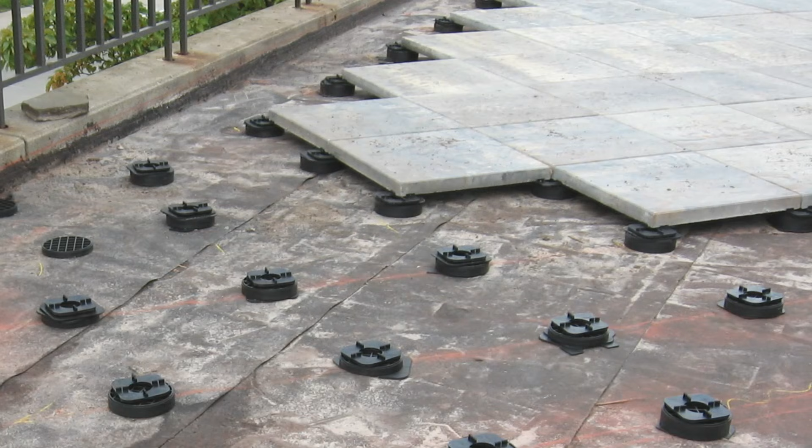Rooftop decks are probably one of the most risky building conditions that we consult on and are a favorite of architects and clients alike. If you're a builder or a roofer, you probably hate these things because of the risks associated with leaks, condensation, foot traffic, attaching railing systems, and all the other stuff that goes along with the complexities

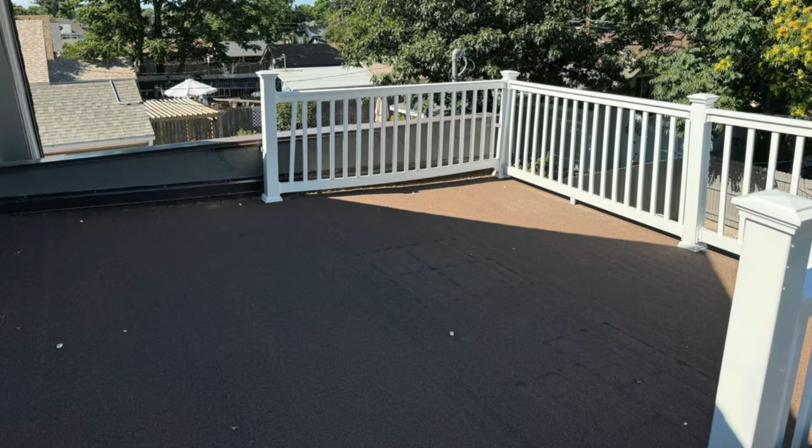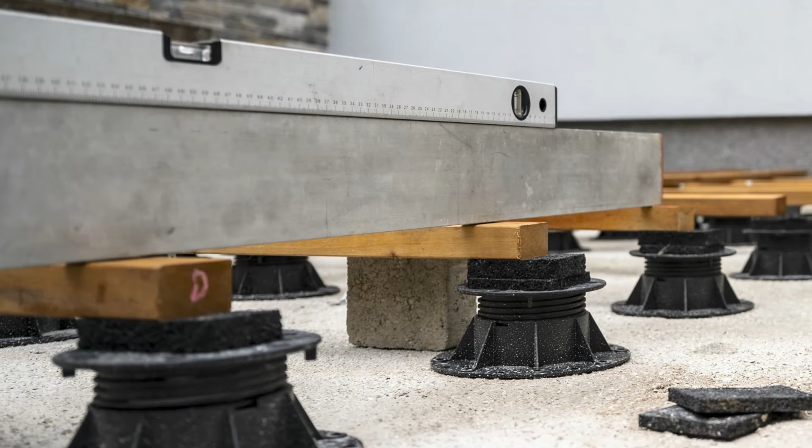of these systems. However, there's one huge problem that we see all the time when it comes to a walkable rooftop deck or terrace that's seldom accounted for by architects and designers, and we catch this error frequently when we redline architectural plan sets before they're submitted for permits or construction documents, and that's the fact that no one ever takes into account the thickness of the roof assembly components relative to the elevation of the finished floor. Now, you might be thinking, what you talking about, Willis?

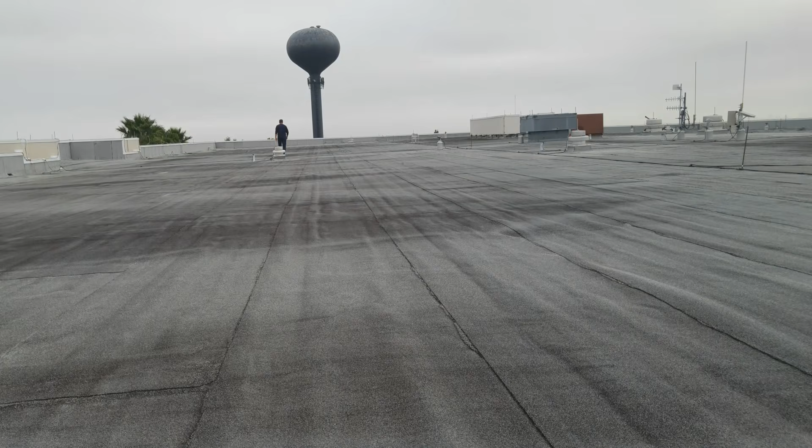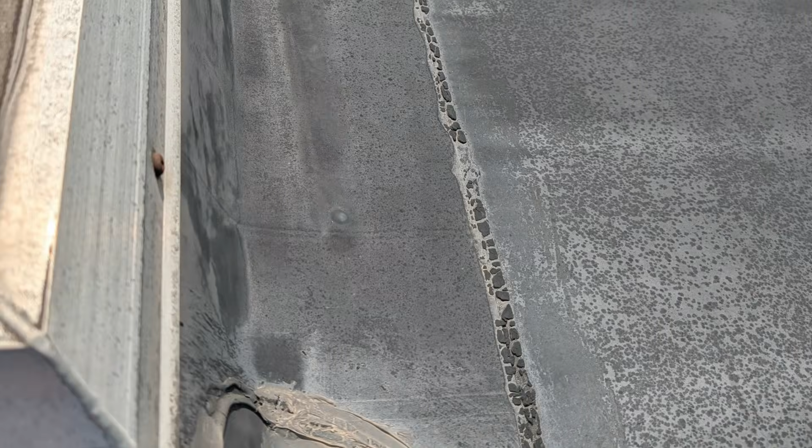Rooftop deck assemblies are essentially flat roofs that you can walk on. Flat roof assemblies are designed in a very specific way to manage drainage, water intrusion, wind uplift, condensation, and general weathering and exposure. They need to be designed as unvented assemblies with exterior insulation to manage condensation by warming up the condensing surface of the sheathing or structural decking, and that exterior insulation also should be part of a tapered insulation system to provide a slope to the roof assembly.

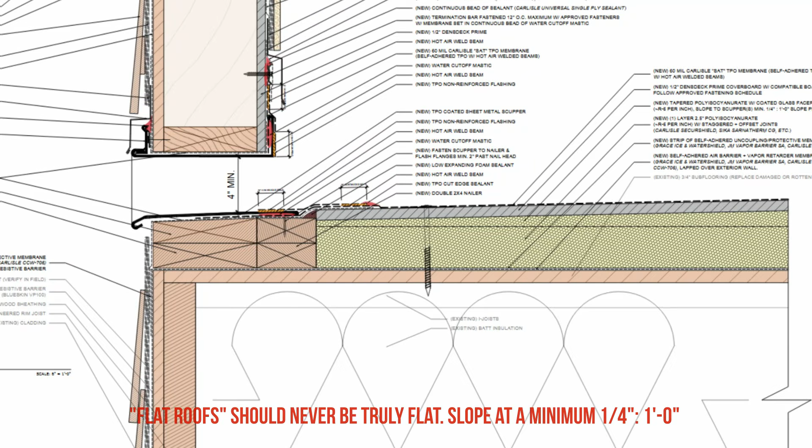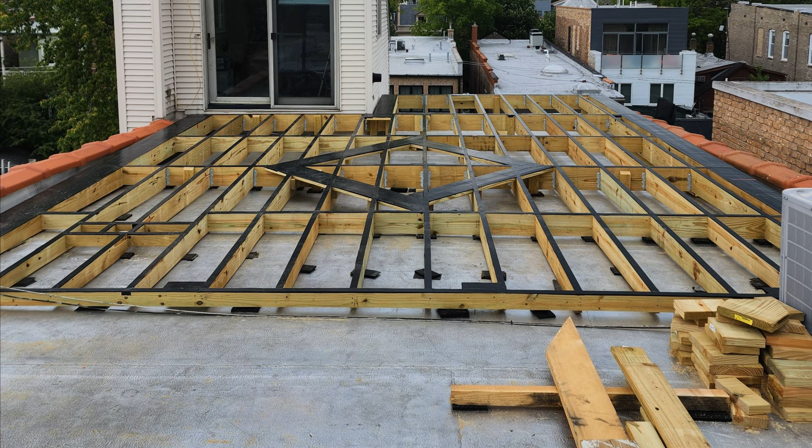Remember, flat roofs are never actually flat. They have a slight slope of 1/4 inch per foot to drain water off of the roof, or at least they should. Now, between the buildup of the rigid insulation and the tapered insulation, as well as the thickness of the pavers or decking system that you're using, and the total length of that roof from the top of the slope to the bottom of the slope, this can add some substantial thickness to the roof assembly. And what we end up seeing is that the buildup of those components has a tendency to throw off the elevation of the door thresholds.

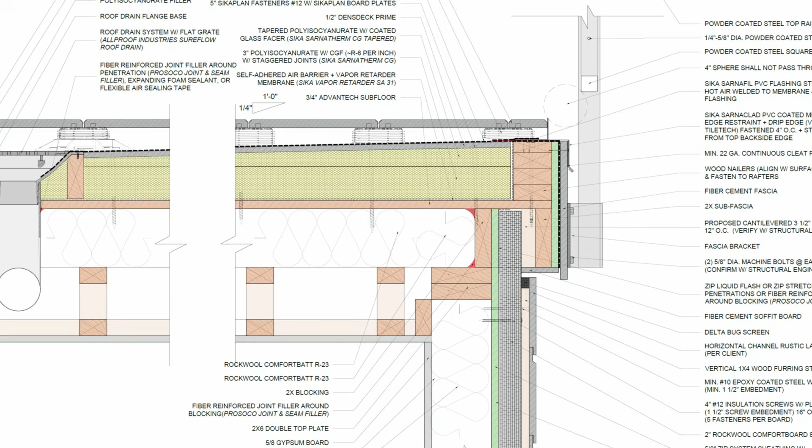Think about it, if you've designed the surface of the rooftop deck to be flush or close to flush with the interior finished floor so that you have a nice uniform transition, if you didn't take into account the thickness of the buildup below and the slope of the roof, then that buildup will impede on the ceiling height of the rooms below, as well as the structural system holding up the roof structure. Now, we need to have a dropped ceiling at these locations to accommodate that added buildup. Ask me how many times I've seen this happen.

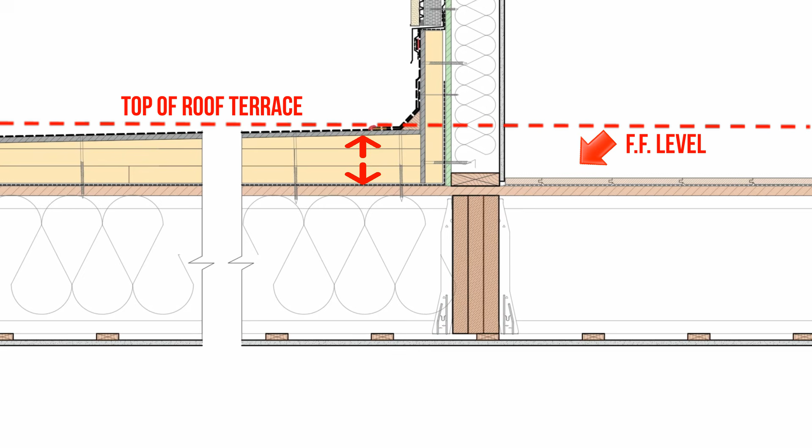On the other end of that spectrum, if the roof structure was designed so that the sheathing or structural deck is flush with the interior subflooring, then that means that the buildup of roof assembly components will push the finished surface of the rooftop terrace above the level of the interior finished floor, which is generally a big no-no from a water management perspective, unless you don't mind having a step up or a landing to get to the door threshold from the interior side.

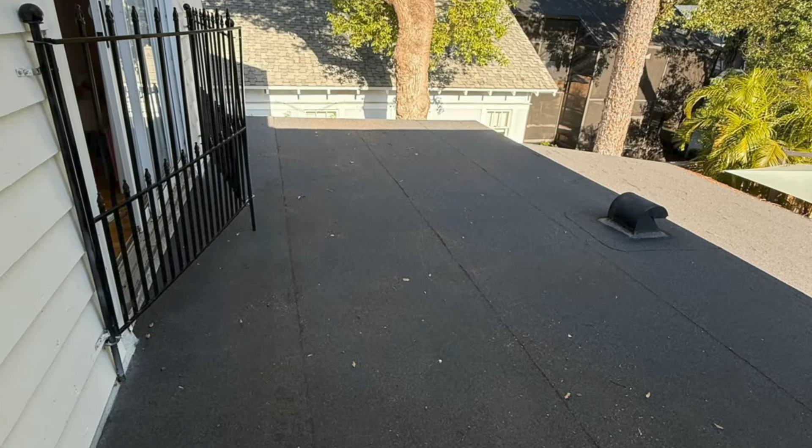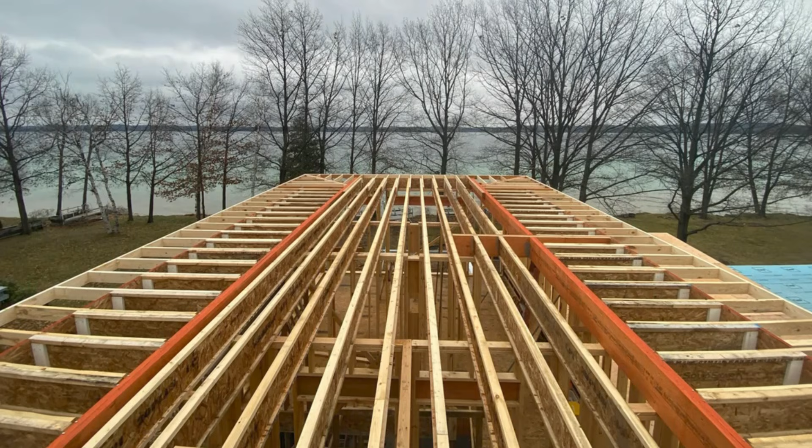We see this a lot of times on retrofits or additions in which the design professional hasn't accounted for the assembly buildup, and then we have to break the bad news that they need to redesign the roof and their ceiling heights. Sometimes the structural system can be modified to accommodate the thickness of the buildup without negatively impacting the finished floor elevations, but this is still a major disruption in the design process if this hasn't been considered.

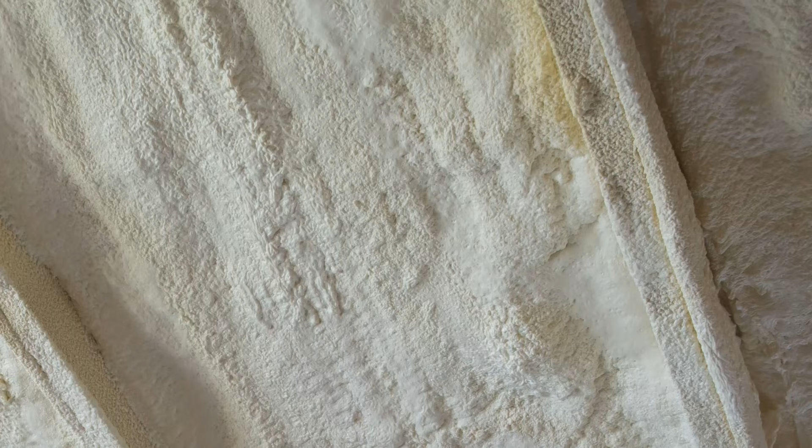Now, in a pinch, you can use closed cell spray foam on the underside of the roof deck to provide some condensation control, provided that you have a means of sloping that roof surface above to a roof drain or gutter system, but it's generally a last resort, as we have seen spray foam fail in these scenarios, especially if the foam cracks from building movement. However, it is a viable strategy if you have a little bit of tapered, rigid insulation above.

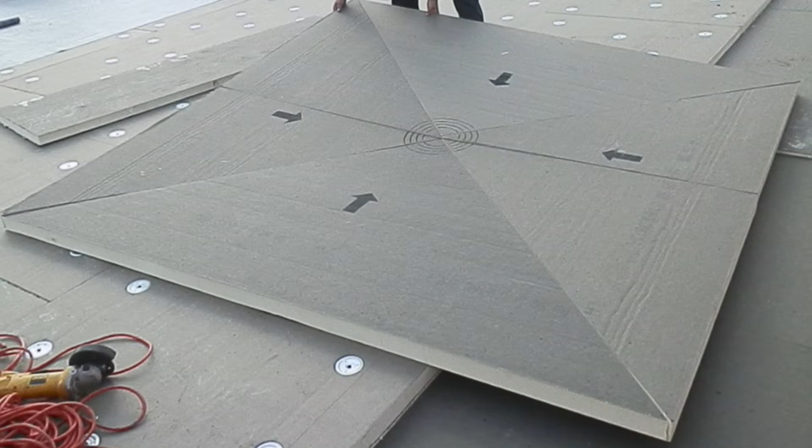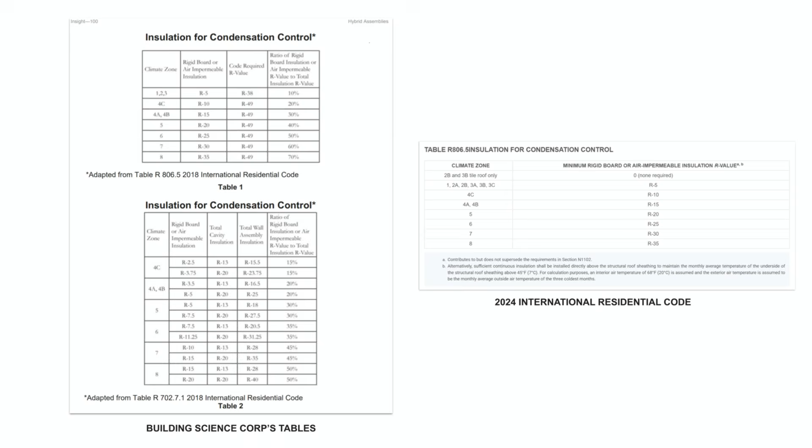As you get into colder and colder climates, the thickness of that buildup becomes a lot more substantial because we need more insulation outboard to control condensation, and so if you're building a rooftop deck in places like upstate New York or Maine, you need at least 50% or 60% of the total R value of the roof assembly installed as outboard insulation. If you need an R60 roof, you need at least R30 to be installed as exterior insulation, which is something like 5 inches of polyiso, and that's not even including the thickness of the buildup of the

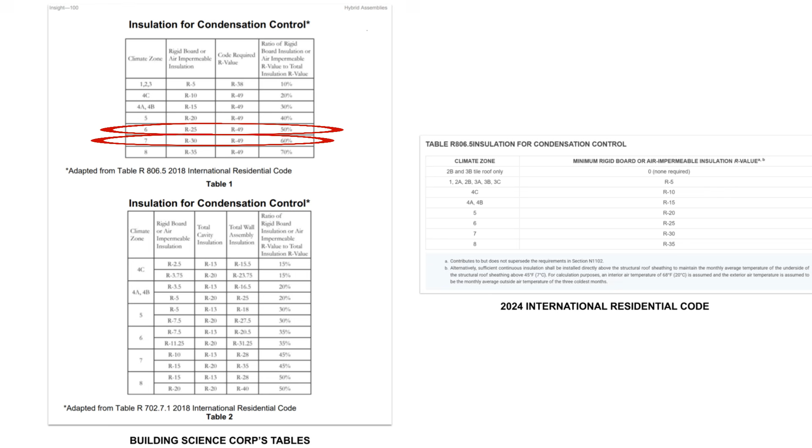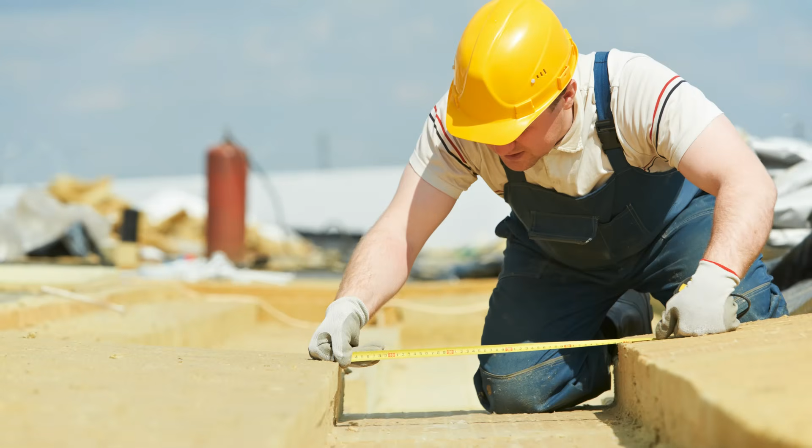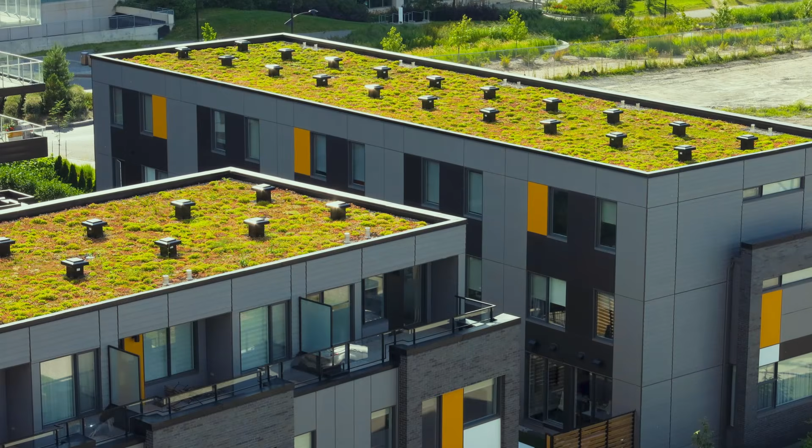tapered insulation above it. Some people don't want to use polyiso and would rather use rock wool instead for their rooftop deck assembly, which has a lower R value per inch, meaning that you need more insulation to achieve the minimum condensation control ratios, which means you'll have a thicker roof buildup. If you want to do a green roof with a walkable rooftop terrace, this will also have a substantial impact on the buildup of components and the assembly design.

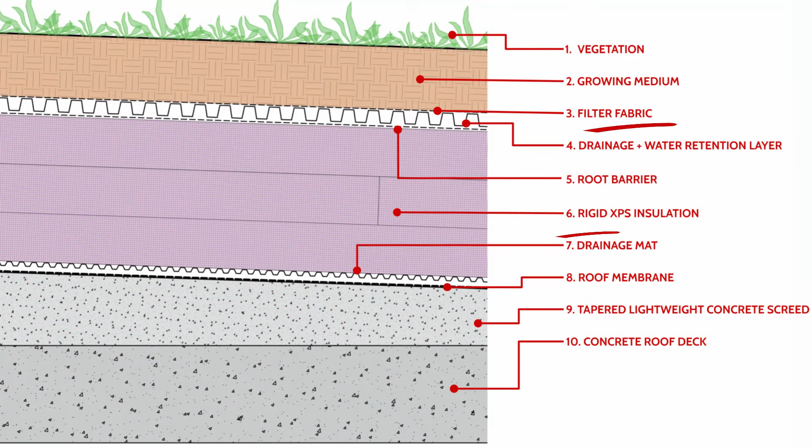Green roofs need to be designed as protected membrane roof assemblies, also known as inverted membrane roof assemblies, in which all the insulation is installed outboard of the roof membrane to protect it from the damaging effects of water, heat, and ultraviolet light, as well as mechanical damage from foot traffic and maintenance. These roof assemblies have to use a specific buildup of components with a specific type of insulation and with specific drainage and water retention layers relative to the growing medium and vegetation.

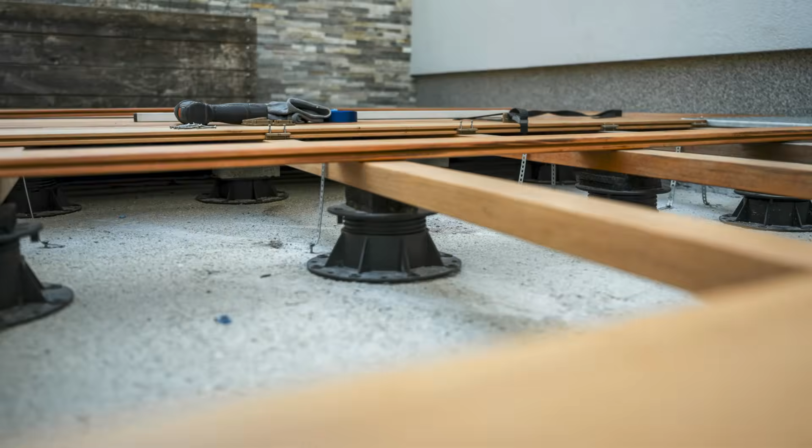There are a lot of design considerations when it comes to these systems, and you can't just throw them onto a roof assembly and hope it's going to work out without careful planning of the assembly components, the thickness of those components, and the drainage runs on the roof, which ultimately dictate how much depth must be accommodated by that roof relative to the door thresholds.